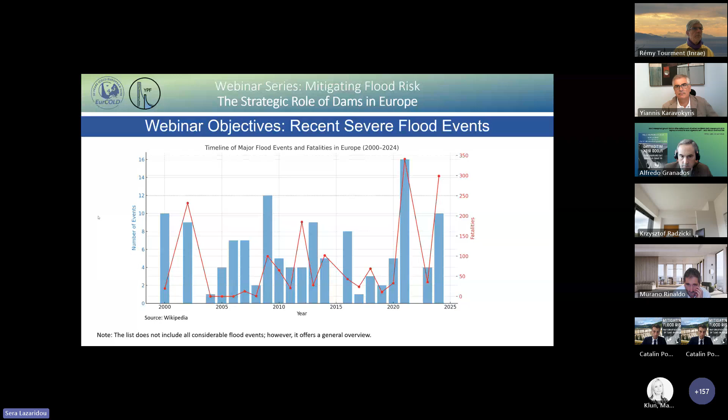Another objective of the webinar is to highlight the role of dams in mitigating flood risk within the framework of European directives and national regulations. The EU Floods Directive, as a general framework, recognizes that floods arise not only from rivers, rainfall, or the sea, but also from man-made infrastructures such as dams and reservoirs. However, dams are not recognized only as a potential source of risk. They are acknowledged for the major benefits they provide in flood control.

Many reservoirs across Europe are operated to temporarily store flood waters and reduce downstream peaks. The directive requires these operational measures to be documented in flood risk management plans, together with their expected effect on flood reduction. In recent years, member states have also been encouraged to adopt more adaptive approaches, for example, adjusting rule curves or releasing water in advance of extreme rainfall based on forecasts. These actions help to increase available storage and are often coordinated with operators, water agencies, and civil protection authorities.

Because the Floods Directive must work in harmony with the Water Framework Directive, any changes in dam operation for flood control must also respect environmental flow requirements and avoid ecological deterioration. Across the EU, this combined approach, assessing failure risk, improving preparedness, and using control operation, shows that dams are viewed both as potential hazards and as vital tools in reducing flood impacts. The overall goal is to ensure coordinated, transparent, and adaptive management of reservoirs within each river basin.

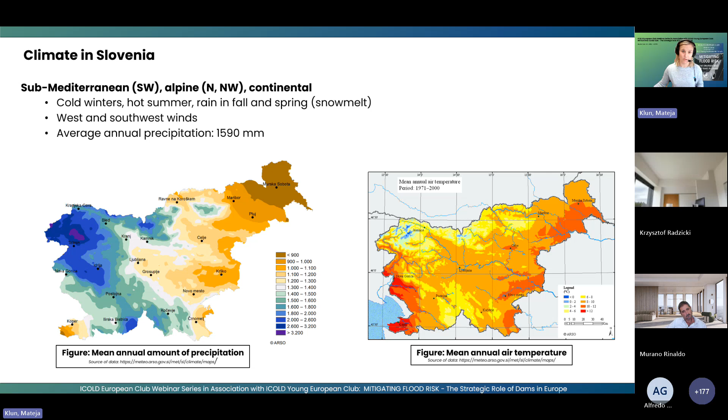The average temperatures in Slovenia are around 10 degrees. Then again, based on the local properties, these values vary quite a lot. Similarly to the weather formation is also our hydrography and terrain. We have a lot of rivers and watercourses, roughly 2 kilometers of river stream per 1 square kilometer of our territory. We have 4 large rivers. The majority of them flow to the Black Sea, and one of the large rivers, the Soča River, flows to the Adriatic Sea.

Regarding the terrain, we are located in the region where the Alps, the Pannonian Basin, the Mediterranean, and the Dinaric Alps meet. So there is quite a large diversity in the terrain, and similarly when it comes to weather. When a weather front in Slovenia moves just a few kilometers, when we are talking about warning the nation, an entirely different part of the country can be flooded, just by a little bit of a switch or uncertainty in how the weather is forming.

So besides these properties, our country is also very prone to landslides. More than half of the country is identified as an area with high landslide susceptibility. So when it comes to natural events, a lot can happen to us, and a lot has been experienced in the past. So now in 2023, what was happening in August?

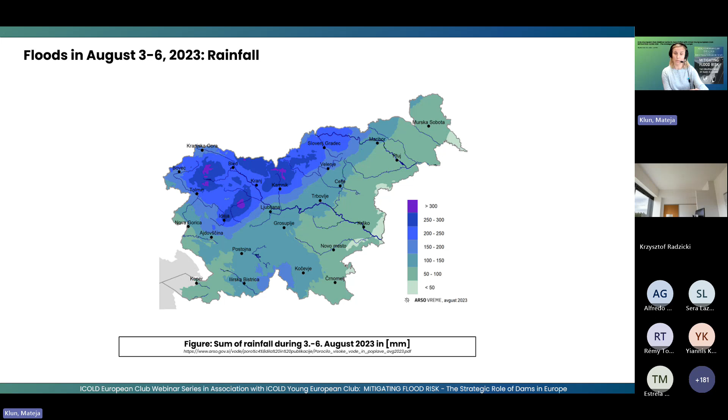Our National Environmental Agency has a distributed network of hydrological stations, and at 122 hydrological stations, extreme flows were measured. 74 rivers across Slovenia were flooding during those 3 days. At 31 stations, the measured flow was a 100-year flood or even larger. And this was also not usual. The 3 largest rivers, Sava, Drava, and Mura, were all flooding simultaneously. This was not something that we had experienced before.

Here are some figures from the flooding, the landslides, and the effects that happened during the event. Basically, 17,000 square kilometers of Slovenia were affected. We had over 1,200 larger landslides and a lot of smaller ones. Roughly 1,000 households were destroyed and 15,000 households affected.

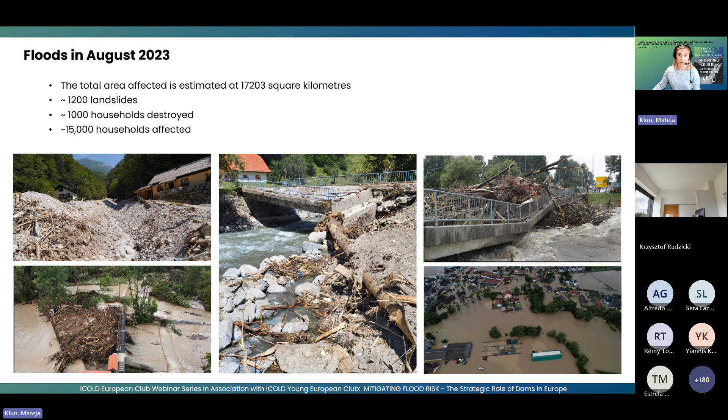At the moment, we are still in the rehabilitation phase. It has been estimated it will take us 5 years, probably in the end even longer, to recover from this disaster. Now, if I go further into the dams, we have in total 43 large dams in Slovenia and an additional 28 that have special operation regimes. Also, we have a large number of smaller dams, mostly located in the Alpine region of Slovenia.

In today's presentation, I will focus on the run-of-the-river schemes because they were the ones that were involved. We have run-of-the-river schemes which are mainly used for electricity production on three main rivers: Drava, Sava, and Soča. As I mentioned, run-of-the-river means what flows in also flows out, and they have only limited retention capacity. All of our rivers have a torrential character, so we have very high yearly fluctuations of flow, and we have operators that are used to dealing with situations with high flow variability.

If I now focus on the Sava River. The Sava River is basically the largest Slovenian river that has its origin in Slovenia. We have other large rivers, but they are not originating in Slovenia. So what was happening on the Sava River? As I mentioned, we were warned by the National Environmental Agency one day before the event that we can expect large flooding. And this means that the operators of the dams need to go into the flood regime.

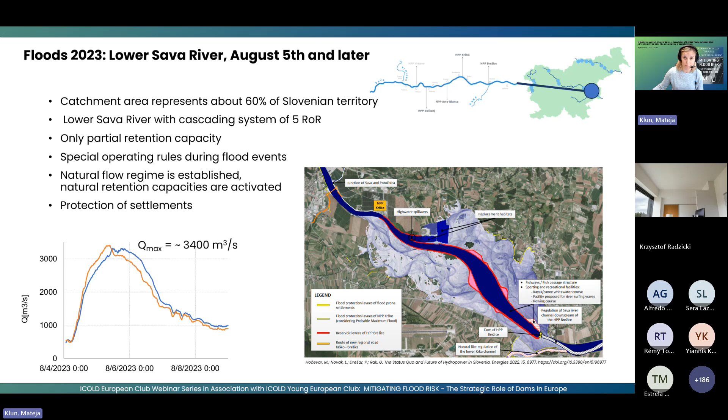During these floods, these flood retention areas were activated. We had similar flows in the year 2010, when the last two dams in the chain weren't installed, and there was flooding. Krško town was flooded and other settlements in this region were flooded, but this time, with the activation of the flood retention, the settlements were protected. And this area drains roughly 60% of the Slovenian territory, the territory where at this time we had the rainfall. We had floods upstream, but basically this region, due to the dams, was protected from flooding.

It was activated the entire month before, and it's used to protect the settlements in the karstic region from flooding, and it has worked. So basically it has 12 million cubic meters of volume, and the water that flows through the settlements is redirected to this reservoir, and then it's slowly released downstream.

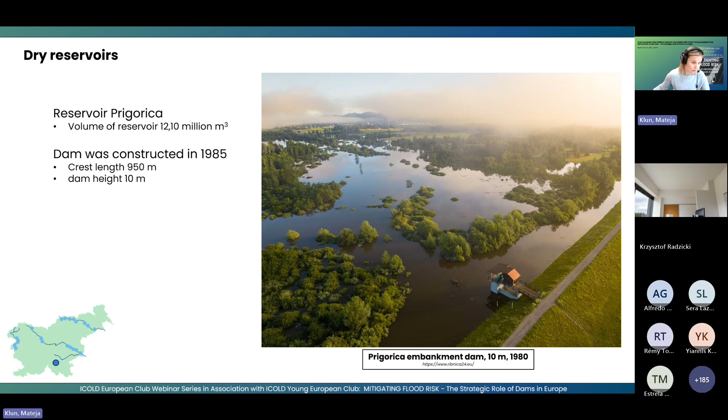And another case, and I will finish with this case, this is the case in the south of Ljubljana. As I mentioned, we had flooding happening in 2010, and in 2010 also the south part of the city of Ljubljana was flooded. In this time, there were measures to mitigate flooding in the south of the city, including the building of the dry reservoirs. And in 2023, with similar flow situation, the south part of the city of Ljubljana was not flooded because the dry reservoirs did their job.

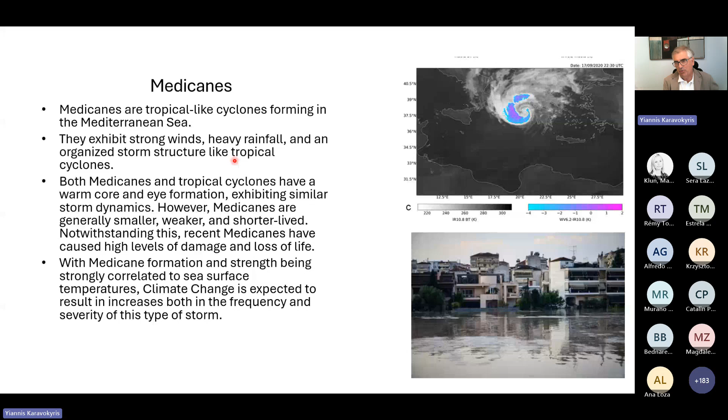One can see rainfall. Maximum daily rainfall in Thessaly, areally weighted, was 273 millimeters, over the entire event just under 300 millimeters. And there were some stations like Plastira hydropower station, which measured 535 millimeters in one day. So this was a very severe event.

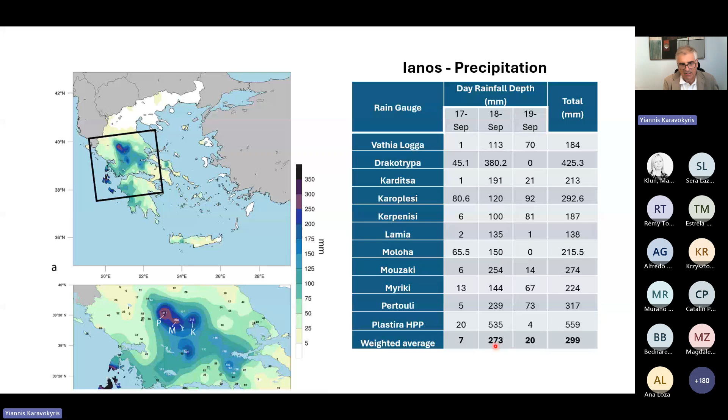And of course it had, as expected, quite severe results, particularly in the western part of the Thessaly plain, because this is where most of the rainfall was concentrated, the high intensity rainfall. On the right picture, we can see the city of Karditsa, another 15 villages. Overall, 5,000 homes were flooded and businesses, and there was extensive damage to cultivations.

Now, moving on to Medicane Daniel, which took place only 3 years later. This concentrated minds, because one can always think that a Medicane like Ianos was a one-off event, but then we have another one which is worse within 3 years, and not exactly the same, but very similar mechanisms, actually, especially concerning what happened in Thessaly. This low system actually did develop in the Ionian Sea to the west of Greece, and then it moved southwards, intensifying, in fact, to Libya, and there in Libya, of course, it caused huge damage because of the failure of 2 dams.

Compared to Ianos, when in Greece, pressure was not as low as with Ianos. And this is one of the reasons that it didn't cause so much damage where it was located. But as we shall see in the next slide, there were synoptic circumstances, meteorological circumstances that created very high rainfall, again in Thessaly, induced by this system.

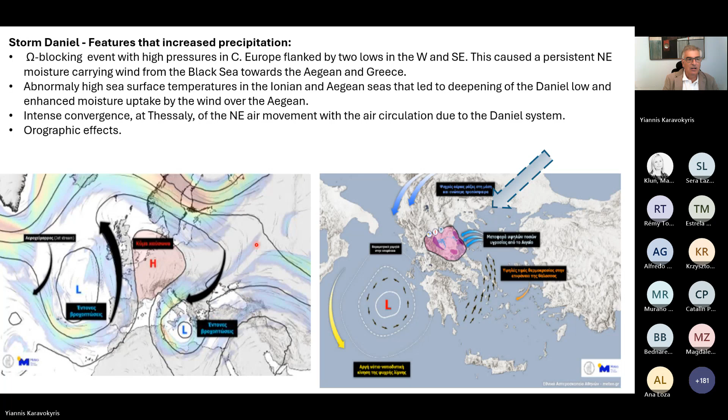But you can see some of the measured rainfall depths. The max, in 2 neighboring stations, was 765 and 760 millimeters. This was a record for Greece, and 757. And these are sorted in decreasing numbers. So you can see that we had several stations above 300 in one day. Now, when looking at storm total over the 3 days, above 1,000, of course, is more than 1 year for Greece. So these are huge depths.

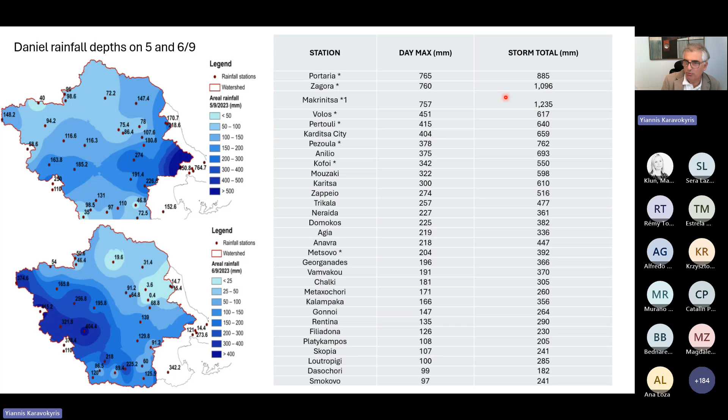Not surprisingly, again, we had very big impact. About 10,000 hectares remained underwater almost a year after the event. Overall, the agricultural land that was flooded was much more. There were 16 deaths in Thessaly. A lot of people had to be evacuated, but about 4,500 people had to be evacuated in an emergency manner by airlifting or by boats. The city of Volos, which I mentioned just now, was damaged a lot under an urban type of flood.

Major transport works were affected, and the railway line, for example, was cut for considerable time after that. Total damages were estimated at 2 billion euro, but these are direct damages. I mean, certainly there would have been indirect impact also.

Now, we should also mention Libya, because there Daniel led to the breach of 2 dams, and then the flood waves went through the city of Derna, and there were more than 10,000 deaths. This was a huge event for Libya.

What I wanted to point out is that besides rainfall, you can see this barrage dam within the plain. This is the main river, Pinios. During the flood, we had a lot of debris coming down, which also affected it. This is a 10-meter width gate. It's not only the flood event itself, the flood water, but also all the debris that affected the capacity of the structures to accommodate the floods.

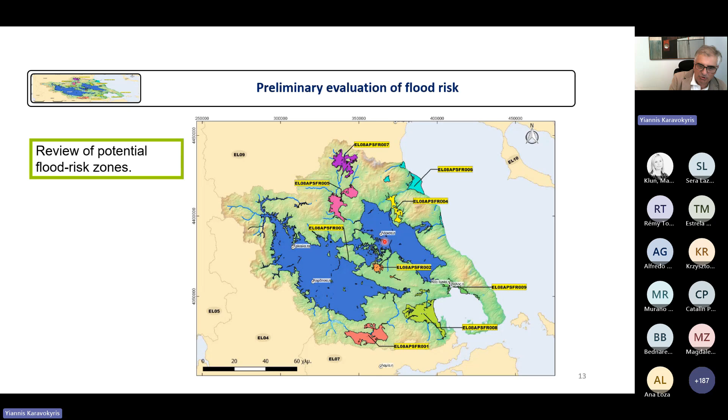So yes, first of all, the zones of focus had to be based on past records and on a first fast assessment of risk. And you can see the codification of the different zones for the entire country so that we have a unified system.

The depth, duration, frequency analysis was carried out by a team of NTUA, National Technical University of Athens. They applied uniformly the GEV, generalized extreme value distribution, for the whole of the country, and we arrived at grids of parameters for the whole of the country. This is the grid of parameters for Thessaly.

As I mentioned, we used HEC-HMS. The same was used for the entire country. We had a unified methodology to produce, in the surrounding mountainous areas, the hydrographs coming into the flood zone, and then the flood risk zone was modeled by HEC-RAS to produce inundation maps.

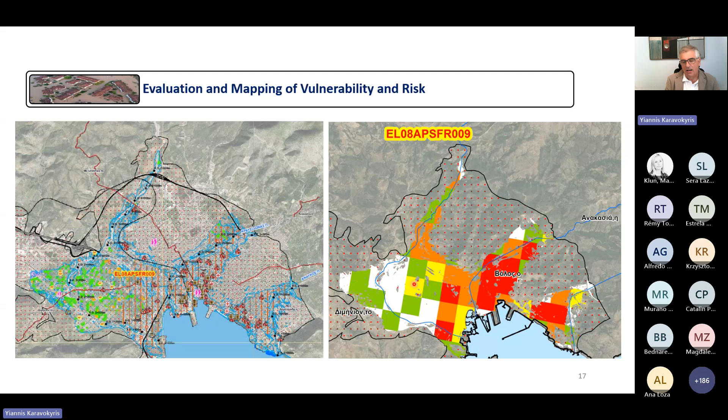We also had to map vulnerability, different sensitive infrastructure within the zones, gridded maps. From sensitive infrastructures and populations we arrive at grids of vulnerabilities, and this allows us to have risk maps in the end. Type of actions: overall, there were 31 measures eventually after consultation.

9 of them were related to prevention. Prevention mostly had to do with change of land uses, even moving infrastructure and even in some cases villages. Protection, of course, is what we will talk about immediately afterwards, has to do with flood protection in terms of structural measures mostly. Readiness has to do with early warning, development of early warning systems, and evacuation and emergency preparedness plans. And rehabilitation is, of course, obvious. It has to do with repairs of damages.

Now, Thessaly has some hydrographic characteristics that influence the type of floods we have and the design of flood protection measures. So there are two plains surrounded by low hills, and then in the periphery we have higher mountains. The western and eastern plain are connected by gorges that form a control in the flow. And the same happens with the eastern plain. Its outflow to the Aegean Sea again is controlled by gorges.

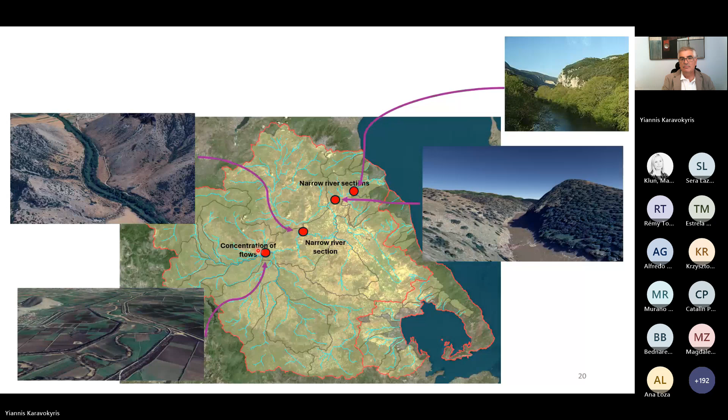So this is again some pictures of the gorges and also the area in the western plain where all flow from all the mountains concentrates and where usually flooding inundation starts. But quickly about the catchment management measures, this program is now under detailed design. It's quite an extensive program.

It is of course controlled mainly by the forestry authorities, and it involves a number of measures related to reforestation, strategic plantings, standard aerial sediment transport checks like terracing, bands, etc., and small check dams in the ravines and small streams. So this is an extensive approach.

And of course, coming to the core of our concern in this presentation, the dams for flood protection. There is already one dam, Smokovo, which is a multi-purpose dam in Thessaly. And when it was designed, flood protection was one component of the multi-purpose nature of the dam. So it was designed with a high freeboard and narrow spillway. It is upstream of the western plains.

There was a lot of flooding in the past in the areas downstream of the dam. This dam didn't allow any flooding during Ioannis or Daniel. What happens is in September, when both events happened, these multi-purpose dams, because it's the end of the irrigation season, tend to be at least half empty. This was half empty, and in fact it didn't spill at all. But as we shall see later on, spills will be much reduced even with the dam at full supply level.

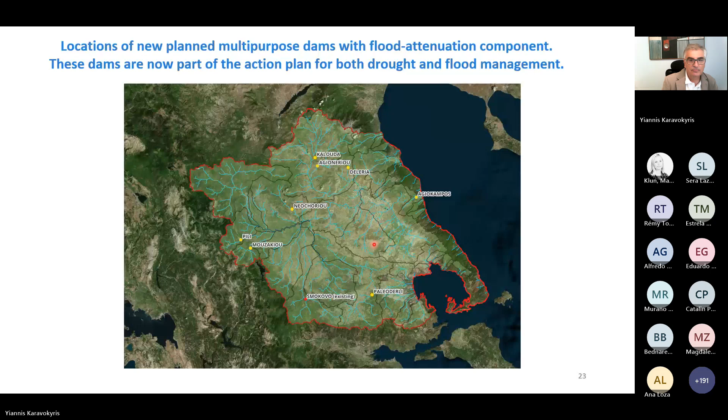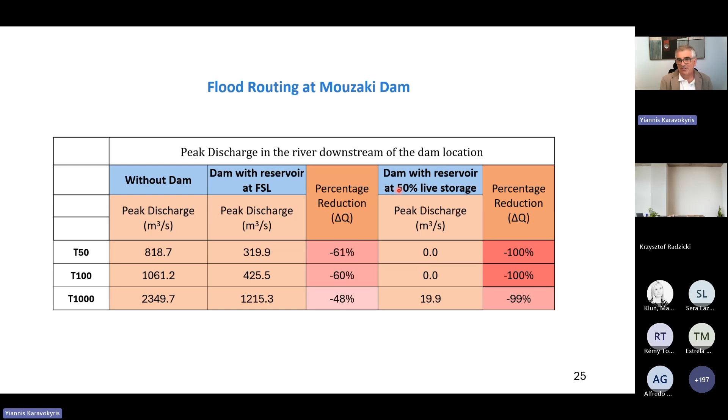So some examples from the new dams. I don't need to stay too long on this. This is the return period of floods that we tried. This is with the dam at full supply level, and this is the dam more realistically for autumn, at about 50% storage. And you can see, we don't need to look at the actual numbers, but the reductions in peak are very substantial, from 61% for the 50-year flood, 48% for a 1,000-year flood, and the percentage reduction is 100% if the dam is half empty, so basically no spilling.

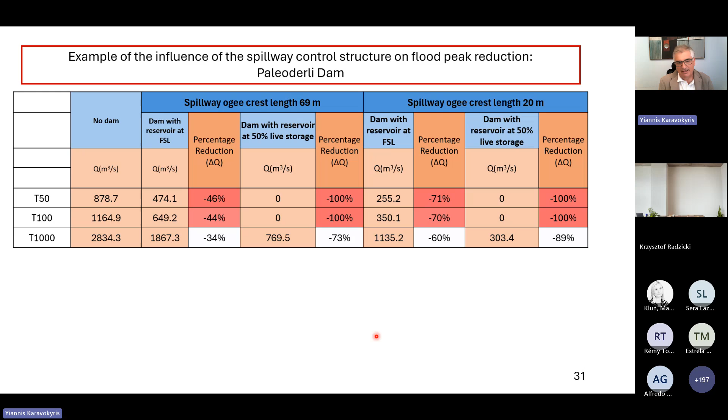And also an example out of interest, what would happen if we raise the dam and reduce further the spillway, because at the moment 69 meters is the preliminary design of the dam. So we can see that, looking at FSL, if we reduce further the spillway, the 1,000-year flood will go from 34% reduction to 60% reduction, and for a half empty reservoir, from 73% reduction to 89% reduction. So one can use this to do an optimization regarding heightening the dam and shortening further the spillway or not.

The benefit of a shorter spillway crest length is of course a greater reduction of flood peak, and the drawback, of course, is higher maximum reservoir water elevation, which leads to a higher dam. So we need cost-benefit optimization there. But for seismically active areas, it should also be taken into account that higher dam freeboard also provides an additional service which allows a greater margin of safety against seismic loading.

Just a very few words on free overflow, which I mentioned for Thessaly, versus gated spillways. Undoubtedly, gated spillways give us a wider choice for flood management policies because they allow us to do a real-time preemptive operation of the spillway. So if we have a stream of meteorological and hydrometric observations, we can preemptively increase available routing volume in the reservoir by opening the gates early.

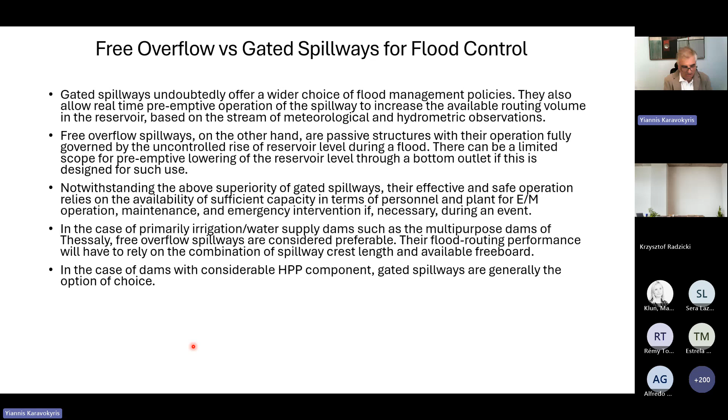So, for example, in the case of Thessaly, where the dams are primarily irrigation and water supply plus flood defense, it is more sustainable to have free overflow spillways. So it is the design of the spillways and freeboard that will give us the flood attenuation and protection component that we require. But if we look at primarily hydropower dams, then gated spillways are probably the option of choice, because the personnel has to be available either at the dam or from where they will be able to quickly tend to the electromechanical infrastructure of the project.

Some final design considerations. Flood routing in a free overflow dam in particular, but in all dams, is a period where you have large fluctuations of reservoir water elevation. In general, this we avoid in normal operation, so a number of precautions are important. For embankment dams, the upstream shoulder should be designed for these fluctuations in terms of drainage and filtering. So for a dam designed for flood routing, these can be higher, more stringent requirements perhaps, than a dam that will only experience large fluctuations in reservoir level in an emergency event.

Also, for all dam types, the reservoir rim and the reservoir slopes may experience instabilities during rapid fluctuations of levels. So really, part of the design should include a good study and survey of slopes around the reservoir, and design of stabilization measures, including provision of better drainage of slopes, if necessary.

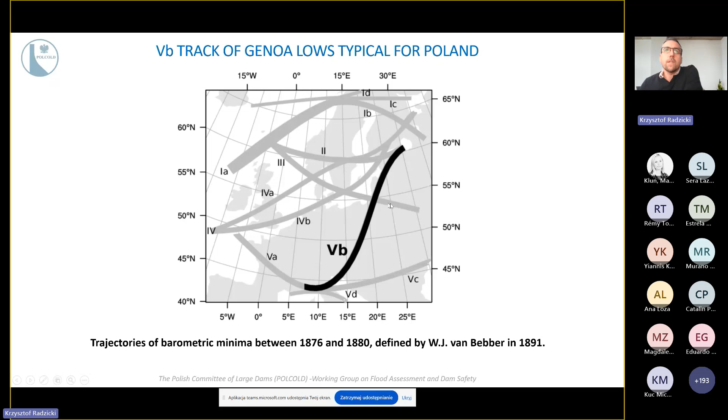So, the September 2024 flood was created in Poland by Genoa lows, which typically touch us every 15-20 years, probably for thousands of years. So it's a typical part of this Genoa low.

And this time, well, usually they make precipitation in the south part of Poland, but it depends. Sometimes stronger on the Odra River mountain catchment or the Vistula River mountain catchment. We have two main rivers in Poland: the Vistula, which crosses the central part of Poland, and the Odra River, which firstly goes along the mountains, and after this along the border between Poland and Germany.

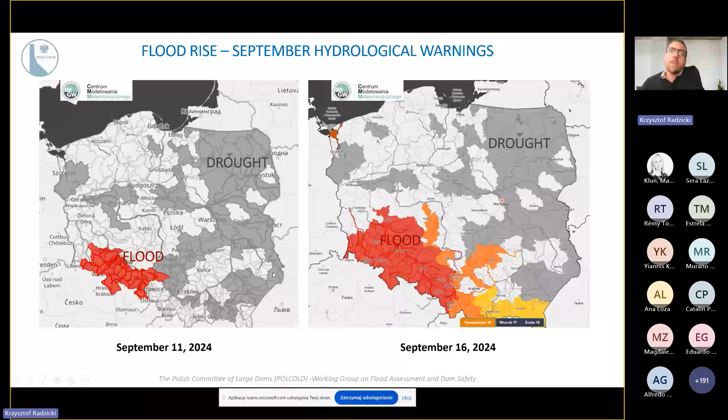So this time, this was mainly the mountain catchment part of the Odra River and a small part of the Vistula River, but it also will be important for this story. And what is important locally, it was exceptional, the first time such strong precipitation was seen in this part of Poland. And so the main precipitation was in this mountain part of Poland, after which the danger of flood was propagated along the Odra River.

Now it is in renovation. And some conclusion for that is that the old masonry dam survived even when flooded. Verification of the discharge capacity of existing hydrotechnical structures for present catastrophic flows is required, with consideration of climate change prediction. If necessary, reconstructing or expanding the discharge facilities and adjusting the reservoir operation policy is also necessary.

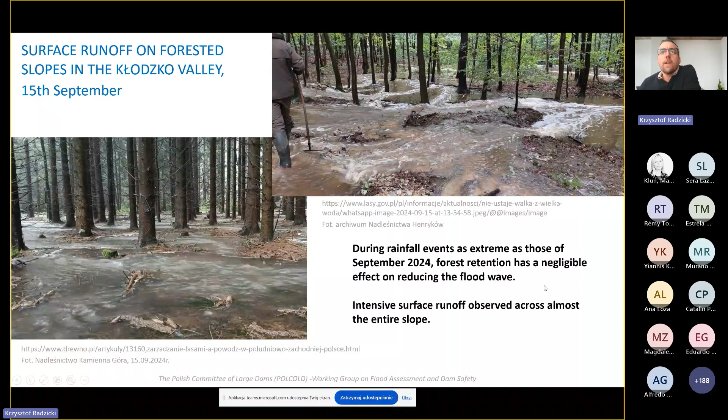What was also very interesting, you can see here photos from the forest in the mountains. So during rainfall events during this time, forest retention was negligible in its effect on reducing the flood wave. Intensive surface runoff was observed across almost the entire slope. There are 4 new dry reservoirs. You can see them. They were built during the last about 10 years, maybe 15 years, and they worked well. Here you can see Roztoki dry reservoir, one of them. So fully filled, it worked well.

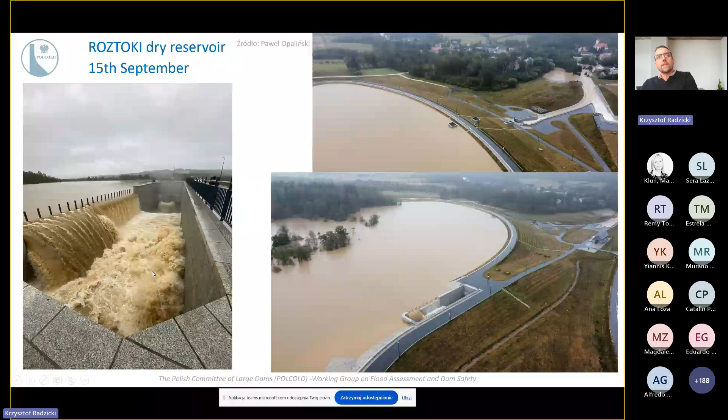And some conclusion. So these newly constructed dry reservoirs operated correctly. However, the small mountain catchments didn't experience the most catastrophic local rainfall that occurred in the Stronie Dam catchment. Some of these new dams significantly reduced local flooding in small towns situated not far downstream from these reservoirs. However, to effectively reduce flood risk in larger cities of the lower Kłodzko Valley, it's necessary to build a coherent system of a much larger number of reservoirs, verified both hydraulically and economically.

So this was the region where these 4 new reservoirs were located. Here we have the small old Międzygórze dry reservoir. It's also an old German masonry dam. It worked correctly. It wasn't overflowed, just the spillway worked.

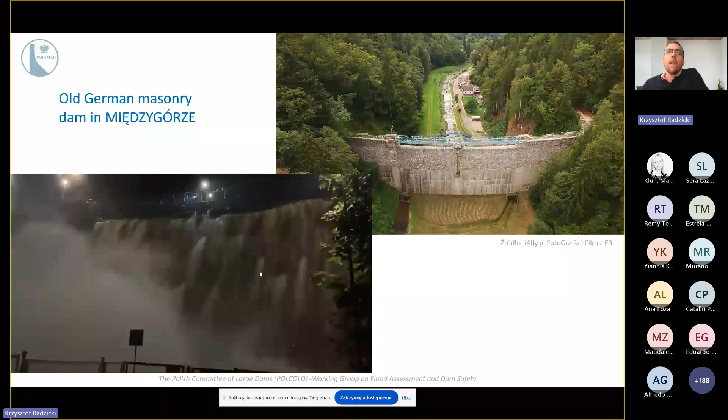And now we go to the east, here to this small mountain catchment. You can see here is the Stronie dry reservoir. Some hundreds of meters below it is Stronie Śląskie town. After 5 kilometers further we have Lądek-Zdrój, an old spa town, and after 30 kilometers down we have the larger city Kłodzko, and the river, the Biała Lądecka river. So this earth dam, the Stronie Śląskie dry reservoir, was a 16-meter-high dam with a very small 60-centimeter wall on the top of the embankment.

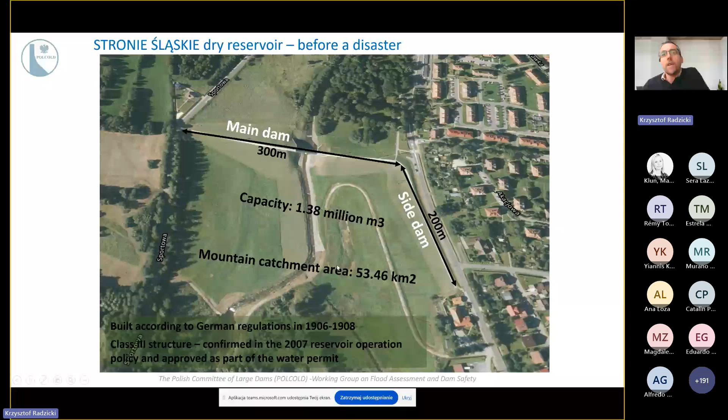Capacity about 1.4 million cubic meters, mountain catchment area about 54 square kilometers, constructed according to the German regulation more than 100 years ago, about 120 years ago.

And this dam was destroyed. There are some very interesting movies about this story, what has happened, a very well documented story, so you can watch it on YouTube if you would like. So the main rain happened on 14th September.

During one night, most of the reservoirs I spoke about were filled. Also this dam. You can see local people tried to build an additional small wall with sandbags, and during the night the reservoir was filled. In the morning it was still filled, but there was hope. People observed that there was a small reduction of the height of the reservoir.

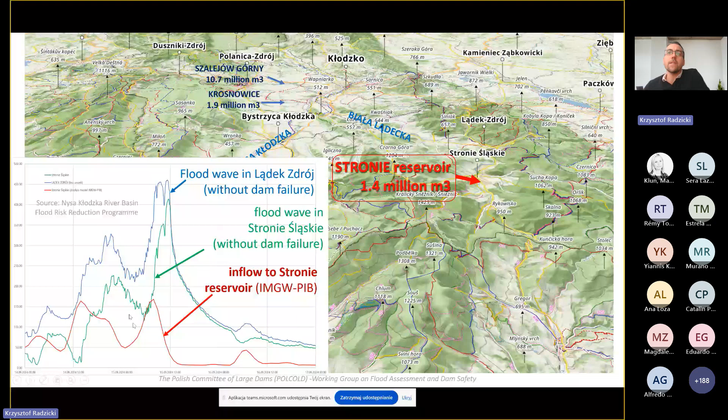However, unfortunately, there was a second event of heavy rain which came to the catchment, and it raised the level of the reservoir higher than the crest. So here you can see this wall of sandbags and some leakages between the sandbags, and some side dams, you can see side dams here, were overflowed. I think the height of the flow was about 10 centimeters, so quite a huge flow, and it resisted even 2-3 hours of this situation.

Here you can see some overflowing by the crest between the sandbags, and unfortunately, after about 2-3 hours, back erosion happened, which was prolonged in the direction of the crest. Probably this hole created leakages, a saturated zone, and water flow in the saturated zone, seepage, created prolongation of erosion and destruction of the crest. And during about 30-40 minutes, the dam was totally destroyed.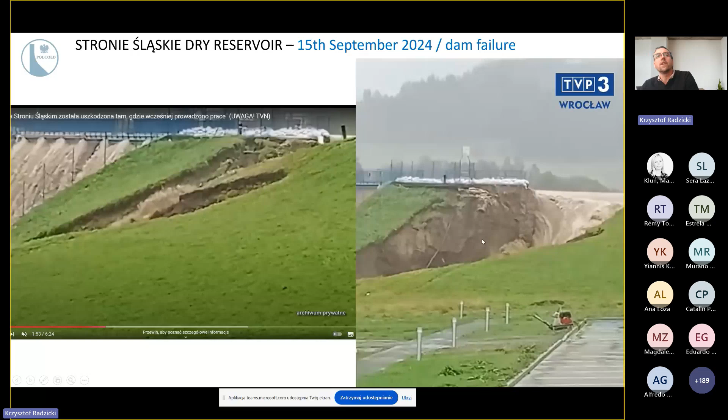Here you can see the effect of the destruction. If you are interested, there is very nice photogrammetry of the catchment after the disaster made by GeoGlass, which is on the internet. You can freely use it to look at it.

Some small conclusions. So the first one, there were unfortunately the pier supports located on the top of the spillway. Not a very smart idea. However, it wasn't the main problem of overflow. Just the wave was much larger than the capacity of this reservoir. Also, we should take care about larger and more robust grates for the bottom outlets to prevent clogging of the bottom outlets.

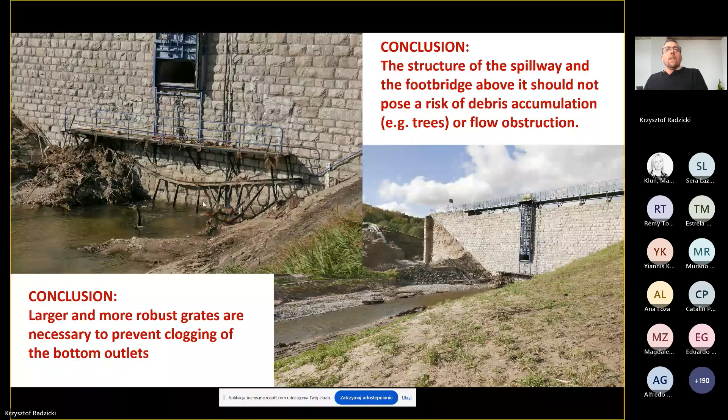And again, key conclusion. So we need in Poland generally verification of the discharge capacity of existing hydrotechnical structures, dams particularly, for present catastrophic flow. Catastrophic flow is required with consideration of climate change prediction. If necessary, reconstruct or expand the discharge facilities and adjust the reservoir operation policy.

So, the Stronie dry reservoir, as I told you, you can look at it on the internet. Some hundreds of meters below there is Stronie Śląskie town, destroyed very seriously. Some houses totally destroyed, many houses partially. After 5 kilometers below, we have Lądek-Zdrój town. Here you can see the hydrograph. So without this catastrophe, it could anyway be flooded by more than 1 meter.

But this wave of the dam catastrophe gave additionally about 120 centimeters of depth. Here you can see the hydrograph, and here this peak modeled. This is the peak of the dam collapse, and it has about 1.4 million cubic meters, so the capacity of the dam. Maximum discharge was 1,000 cubic meters per second.

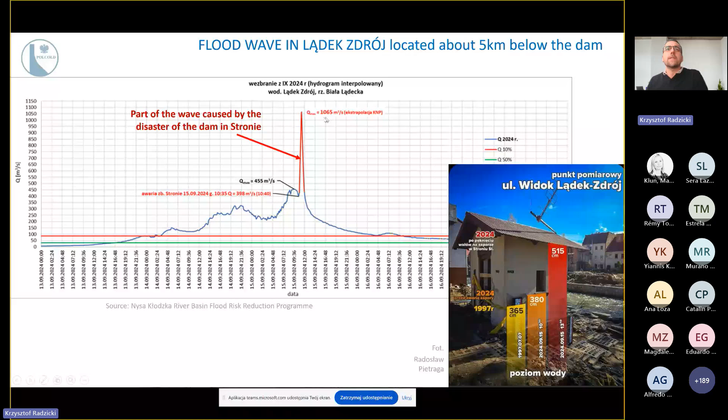So here you can see destruction of the town, Lądek-Zdrój. Also there was large devastation, destruction of the villages and the riverbed between and below these towns. So key conclusion, there was a very serious communications failure. During the dam failure, GSM telephone service in the region collapsed and other means of communication proved inadequate. As a result, the warning about the dam failure didn't reach most of the affected communities, and a nationwide review of the disaster response communication system is therefore necessary.

Also, we can say that the people were used to this dam, that it works. So this failure demonstrates that even smaller dams can pose a catastrophic threat to nearby towns, and we have to take care about these structures. In the town Kłodzko, approximately 30 kilometers downstream from the dam, the wave generated by its failure didn't substantially raise the flood risk.

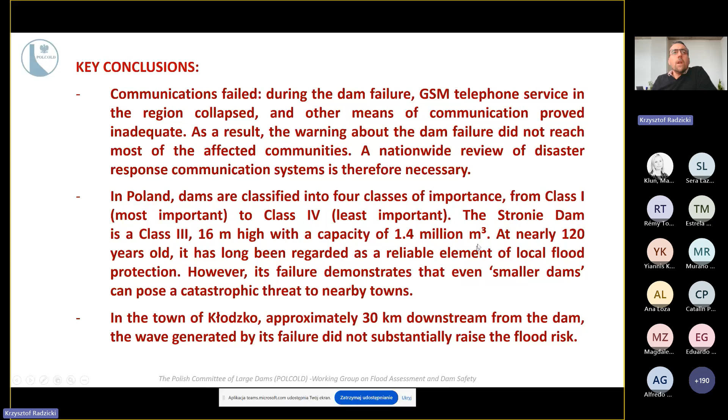New dry reservoirs are planned to create flood protection of the region. Only a comprehensive system will be efficient. I am proud that with my colleague Bolesław Zatoka, we proposed one of the clever solutions of the two new reservoirs that can protect locally Lądek-Zdrój, with a smart bypass between these two reservoirs to protect this town.

Next, the water from this river goes to a cascade of reservoirs, Topola, Kozielno, Otmuchów, and Nysa. And one of them is interesting because we have destruction of the emergency spillway due to heavy flow. So you can see happily it collapsed in a very smart way. Maybe it wasn't a smart construction, sheet piles and gabions between, so gabions were taken out by flow, afterwards erosion. However, the sheet piles collapsed each one on another, so in consequence there wasn't total destruction of the spillway.

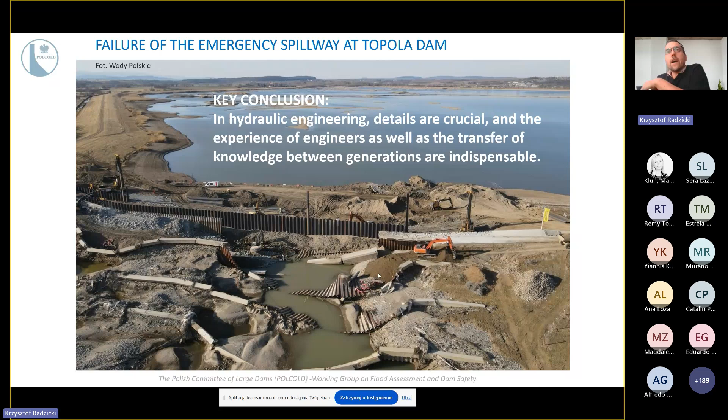However, in hydraulic engineering, these details are crucial, and the experience of the engineer as well as the transfer of knowledge between generations are indispensable. And we have a problem with that in Poland. We don't have enough hydraulic engineers. We don't have enough transfer of knowledge between generations.

After that we have the Nysa reservoir at the end of this cascade. Unfortunately, there was a flood in the city due to two reasons. The first one, I told you about the Głuchołazy town flood here. So the flood overflowed and goes to Nysa town. However, there was also a problem with the dam.

According to the official story, they thought they passed 100 cubic meters per second, but in reality it was probably something like 1,600 cubic meters per second. It means there was a mistake. And of course, the explanation of these mistakes is a serious problem and an investigation, and we cannot speak a lot about the reasons.

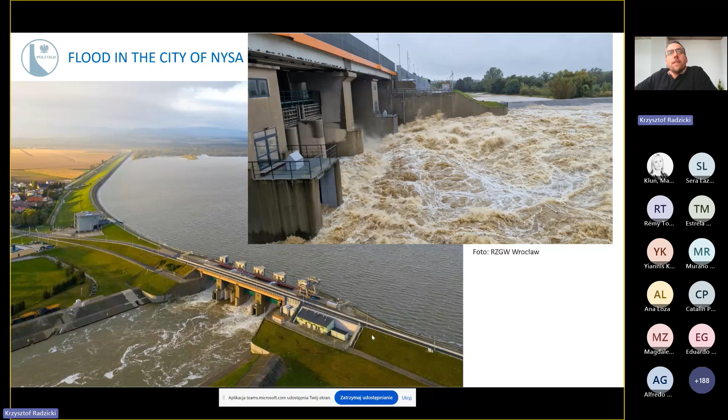However, it's important in hydraulic engineering to take care of the details of the exploitation of reservoirs. Some information is sometimes missed between persons; the transfer of information could be crucial in consequences, for example, like a flood in the town.

After that we have the large Racibórz Dolny earth dam, a large dry reservoir here at the entrance from Czechia. Here there was also quite strong precipitation, which comes to Poland. It is a large reservoir, 185 million cubic meters, filled almost in one day. It works very well, reducing the wave twice, and also delaying this wave on the Odra River.

So the wave from Nysa Kłodzka can pass before the second wave from the Odra. So this Racibórz reservoir had a very important role in flood protection on the Odra River. However, there were some serious problems with backward erosion processes. They were happily protected. However, this dam was constructed after 2010.

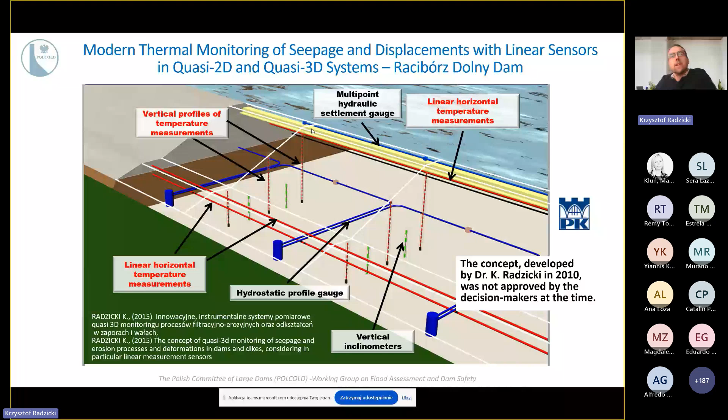In 2010, I proposed a very modern system of linear sensors to detect all leakages automatically. Unfortunately, at that time, decision makers did not approve it. The first system like that was created in Poland in 2014. Regarding the condition of dams in Poland, many of them are in an inadequate state. So as a conclusion, given the large number of damming structures in Poland, many of which are in inadequate technical condition, a key solution is the use of modern testing and monitoring methods to optimize repairs and minimize the risk of failure. And three last slides.

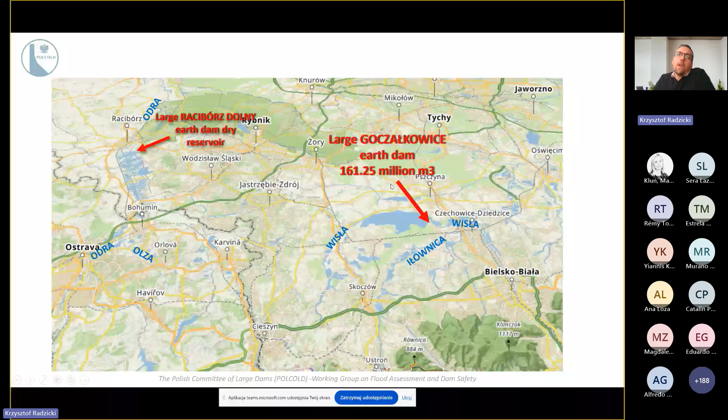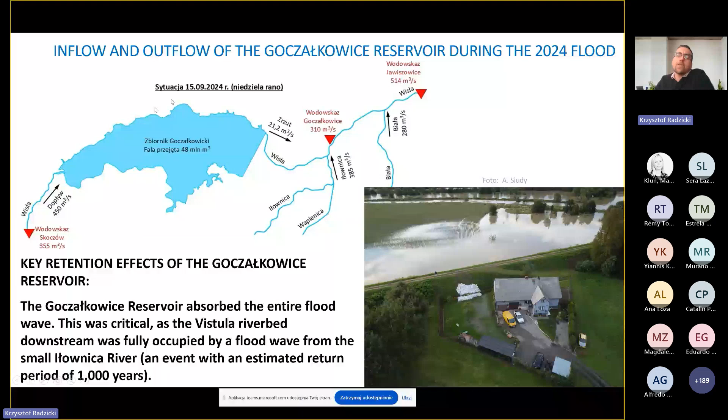I told you also about the Vistula River catchment here. Part of this precipitation in September also touched this catchment. And there is the large Goczałkowice earth dam, 160 million cubic meters of capacity. Happily, during the drought it had a low water level, and it was capable of catching the whole flood wave. Happily, because just below this dam there is a small mountain river, the Iłownica River, where the flood had an estimated return period of about once every 1,000 years, so very huge. So this small river filled the main Wisła River, and happily the Goczałkowice reservoir caught the whole wave.

So the total losses caused by the September 2024 flood in Poland exceed 13 billion, about 3 billion euros. And final conclusion: large flood control reservoirs such as Racibórz Dolny or Goczałkowice Dam are crucial for flood protection of vast areas of Poland, and they fulfilled this role during the September 2024 flood. In mountain catchments, only a system of smaller reservoirs can provide an effective reduction of flood risk.

Dams in Poland must have the discharge capacity of their hydraulic structures verified for catastrophic flows resulting from increasing climate change. If this capacity is insufficient, spillway structures should be expanded or reconstructed and/or reservoir operational instructions revised. For this reason, and considering the unsatisfactory technical condition of many damming structures in Poland, it was largely a matter of luck that no other dam disaster occurred besides the failure of the Stronie Dam.

Communication and warning systems for natural and technical disasters, including dam failures, must be verified and, if necessary, improved. The development and implementation of modern systems, methods and methodologies for testing, monitoring, forecasting precipitation, rainfall-runoff transformation, flows, and dam performance are key to minimizing flood risk and optimizing the repair and modernization of damming structures.

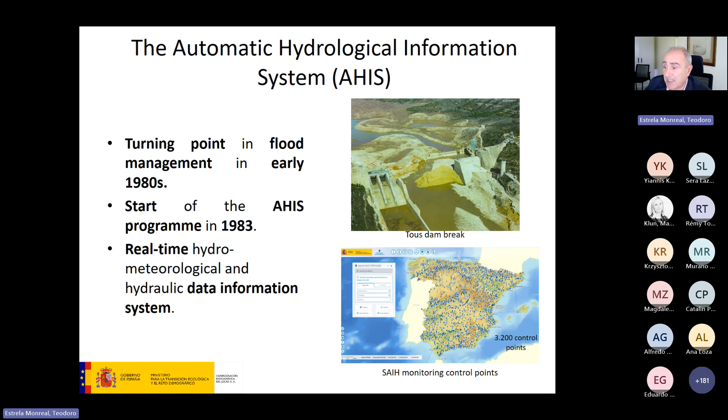Also, more than 40 years ago, the water law and the hydraulic public domain regulation established riverbed and flooding zoning in Spain. That really has been very important to avoid damage in the flood plain. In the year 2008, a new zone was added, what we call the preferential flow zones, and then important land use restrictions were established in the year 2016. And now new changes are being prepared in our regulation after the October 2024 flood in Valencia.

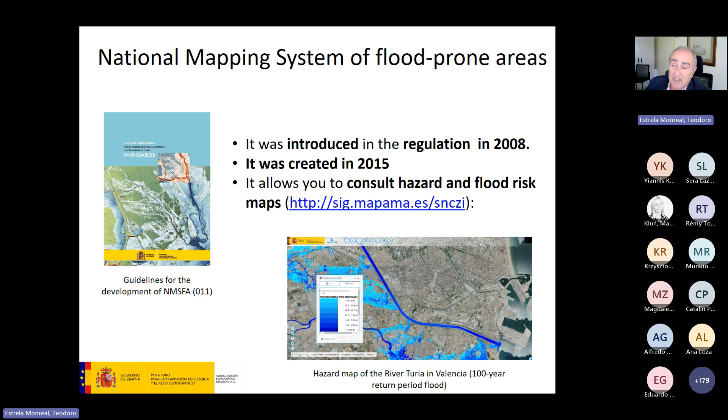As consequences of all these advances, in the year 2008 a national mapping system of flood-prone areas was introduced in the regulation. This system was created in the year 2015, and it allows citizens to consult hazard and flood risk maps in all the Spanish territory. You can see in the figure an example of the hazard map corresponding to the Turia River in Valencia, in this case for the 100-year return period flood. This is an area that has been affected by the 2024 flood.

And also all the EU countries follow the EU flood directive, and we are developing now the new flood risk management plan. As you know, this plan focuses on prevention, protection, and preparedness, and establishes a program of measures to reduce the risk based on risk maps. The last flood risk management plan in Spain was approved in 2023, and we are working on the new plans.

But the consequences of the flood of October 2024 have obliged us to prepare a previous flood risk management plan in order to be approved and to be able to develop some actions in the next years, without waiting for the year 2027, when this management plan is scheduled to be approved according to the directive.

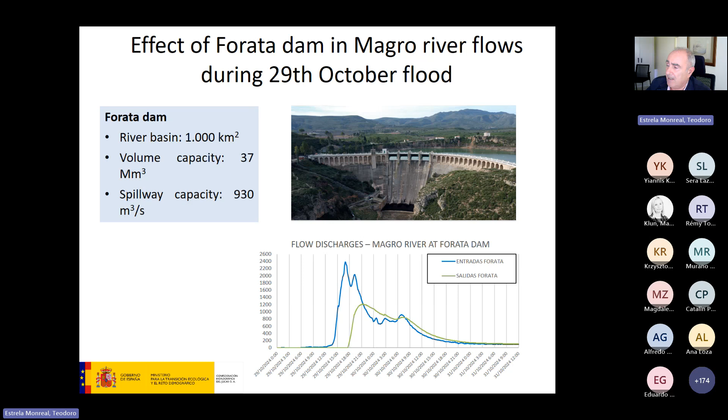The line in blue is the inflow to the reservoir, and the line in green, the outflow of the reservoir. An important volume was stored in the reservoir. It was not empty, but almost empty. And then there was an important effect of attenuation of flows downstream of the reservoir.

We have developed during these last months different models, first hydrological models, then hydraulic models. We had some models as a consequence of the development of the flood risk management plans, but we have had to adapt the models. In some rivers, as for instance the Magro River, the section has increased 30% as a consequence of the floods. The digital terrain model has changed as a consequence of the sediment produced. And we have to adapt the models and simulate, first in order to have a good knowledge of the flood, and then in order to take different measures for the future.

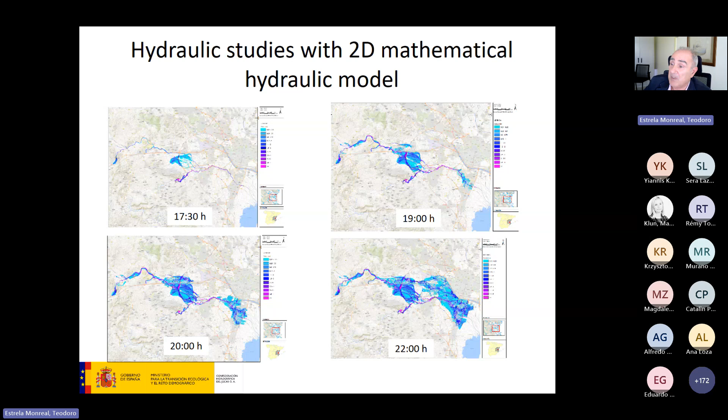This is the evolution of the flood in different hours. As you can see, the response is very fast. In the Poyo ravine, the response time is 2-3 hours, and it's difficult to take measures in 2-3 hours. As I have mentioned, the flows estimated in the Poyo ravine are greater than 4,000 cubic meters per second, much higher than the 500-year return period that was studied and defined as 1,500 cubic meters per second. We are talking about a very extraordinary flood.

And we have to rethink the flood risk management plans carried out to date in this basin and other Mediterranean basins with very short hydrological response time and, consequently, very short time to react for protecting people and flooded areas. The experience of the DANA makes it desirable, first, to consider regulatory change in flood-prone zone management. We are working on that, and in a few weeks surely we will have an important modification of the regulation.

We have to improve the early warning system. We have a good automatic hydrologic information system and models, but we have to improve on it, especially in basins with very short response time. It's important. What are we able to do with this kind of system in this kind of basin?

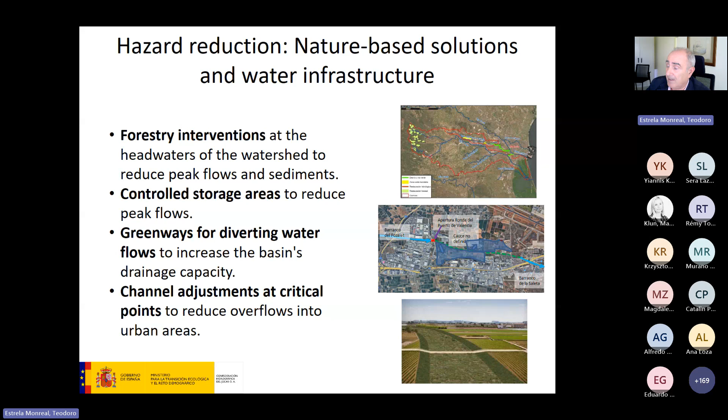For instance, all the controlled storage areas that we are working on are mainly rural areas, and we are studying different solutions in this area. But it's important because in some cases we need to make excavations in the terrain. In other cases, we have to raise some roads, and we are studying the best working of these areas in order to reduce flow discharge. And it's very, very fast what I wanted to tell you.

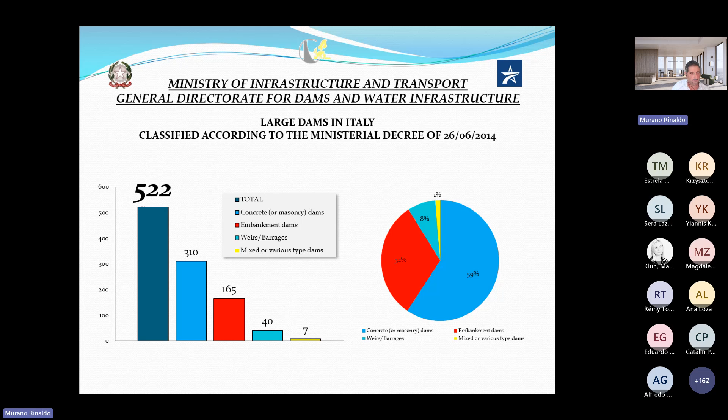I would like to share with you this first slide that, although not entirely exhaustive, provides an overview of the laws and the directives which have followed one another, starting from the second half of the 90s. The main document is highlighted in the blue panel that indicates the directive of the President of the Council of Ministers of 2004. It introduces, for the first time in Italy, the discipline of the lamination plan, a flood control plan that has to be drawn up to use the reservoirs in order to protect territories downstream of the dams

from flood events. But the matter of emergency management and the more general aspects connected to hydraulic risk downstream of dams have been revised and included in the 2014 directives, which we can see in the green and in the orange panels. Actually, they update and integrate the previous procedures. As we can see from the arrows in the slide, there is a strong interaction between these documents.

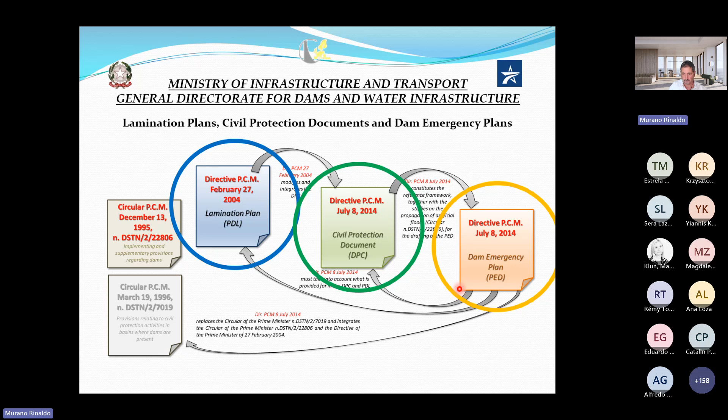And now let's focus our attention on the 2004 directive. It was the first, as I said before, to systematically identify the presence of reservoirs on the territory, intended for the regulation of flow as a possible resource for mitigation of hydraulic risk in downstream areas. Furthermore, the directive of 2004 established for the first time that through specific studies, those reservoirs that could effectively be useful for flood control and therefore for reducing hydraulic risk downstream of the reservoirs themselves must be identified.

In order to make the volumes useful for flood lamination well in advance, two different procedures can be used, defined as static program and dynamic program, from which the distinction between static lamination plans and dynamic lamination plans. The static lamination plan provides for the continuous keeping of a reservoir level lower than the authorized operating level during periods of the year considered critical for the occurrence of flood events.

On the other hand, the dynamic lamination plan operates in real time, requiring the execution of preventive and ongoing discharge maneuvers to be activated based on quantitative forecast of rainfall in the upstream basin and on the resulting expected flow into the reservoir, as well as on the state of the reservoir and the territorially sustainable flow rate downstream of it.

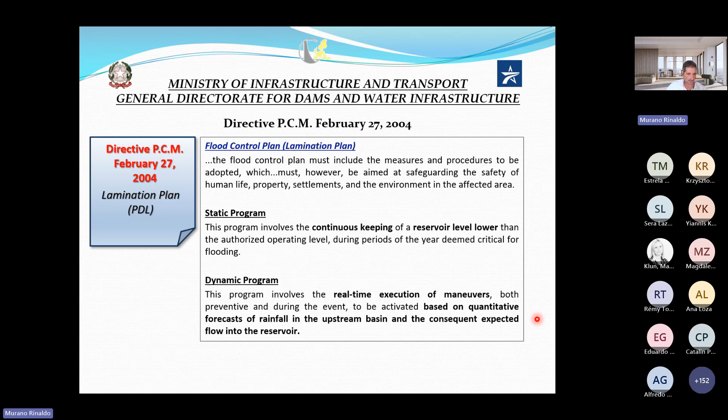The 2004 directive introduced flood control plans. However, especially before the issuing of this directive, in many cases, some large dams in Italy have been subject to operating limitations aimed at the same flood control with other regulatory provisions different from the lamination plan, with the same purpose of mitigating the hydraulic risk of downstream territories.

The Vaia storm was an extreme weather event that affected the northeastern part of Italy, particularly the mountainous area of the Dolomites and the Venetian Prealps. The event started from a disturbance of Atlantic origin, which, within the context of a severe wave of bad weather over Italy, also impacting nearby regions of Switzerland, Austria, and Slovenia, brought to the area extremely strong winds and persistent rainfall. The very strong wind, blowing between 100 and 200 kilometers per hour for several hours, caused the fall of millions of trees, thus constituting a huge natural disaster.

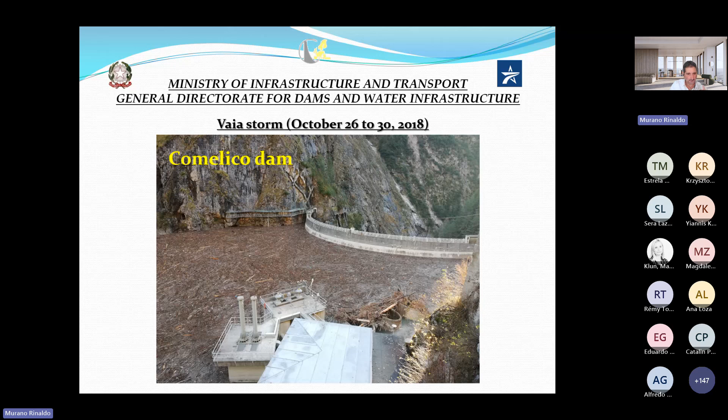Here we can see, for example, what happened to Comelico Dam, with thousands of trees close to the dam swept into the reservoir. The flood, as I said, affected several municipalities in Veneto, Trentino Alto Adige, and Friuli Venezia Giulia regions. The heavy and abundant rainfall caused the Piave and Brenta rivers to overflow, while the Adige Garda Lake tunnel was opened to prevent the overflow of the Adige River too. In the mountain areas, several streams burst their banks and many landslides occurred.

Now I would like to show you how a dam was able to mitigate the impact of the flood. I'm talking about the Ravedis Dam on the Cellina River, realized with the primary function of flood control and the additional function of regulating flow for irrigation and for hydroelectric power production. It has 22 million cubic meters allowable to manage to face floods, 22 million cubic meters.

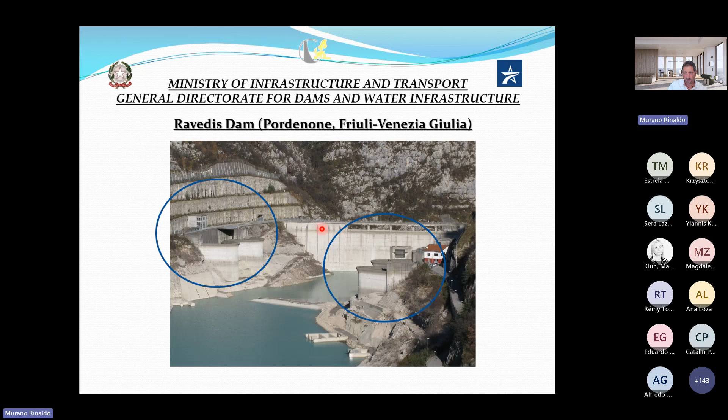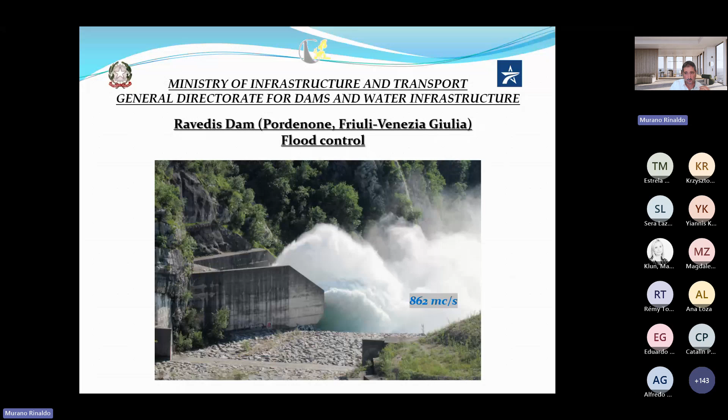Now let's focus on the second topic, hydraulic safety for large dams. We have seen that the use of reservoirs created by large dams can be useful to protect downstream territories, but it can really be useful only if the dams have a structural and functional safety, and if their discharge system is correctly designed and realized to handle floods. So, to better understand the problem, I would like to briefly tell something about the historical evolution of the construction of large dams and of the development of technical regulation in Italy.

But what is important is that the average age of large Italian dams is about 70 years. And it means that about 90% of existing large dams were hydraulically designed and built with empirical criteria, often derived from qualitative correlations, from the professional experience of the designer, without the systematic support of modern probabilistic analysis, of modern probabilistic models.

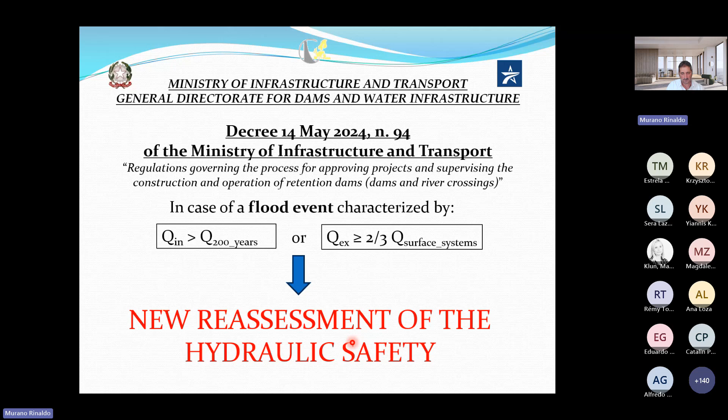So, to take also these climate factors into account, the last Italian dam regulation of 2024, for the first time, prescribes that in case of a flood event characterized by an inflow rate greater than the maximum return period of 200 years, or the use of at least 2/3 of the capacity of the surface spillway, in at least one of these two cases, the dam manager shall submit to the General Directorate for Dams an updated re-evaluation of the hydraulic safety of the dam, and of course of the adequacy of the discharge systems too.

Let's begin with Campo Tartano Dam. The design flow rate was 194 cubic meters per second. The re-evaluation led to 246 cubic meters per second, with an increase of 27% of the original. The consequent works were performed in 2007-2009, and they consisted in a surface enhancement and in the construction of a new bottom outlet.

The Rimasco Dam: the design flow rate was not determined, it is an old dam, but the original discharge capacity was about 500 cubic meters per second. The re-evaluation led to 770 cubic meters per second, with an increase of 53% of the original. The consequent works were performed in 2014-2016 and consisted in the construction of a new bottom outlet.

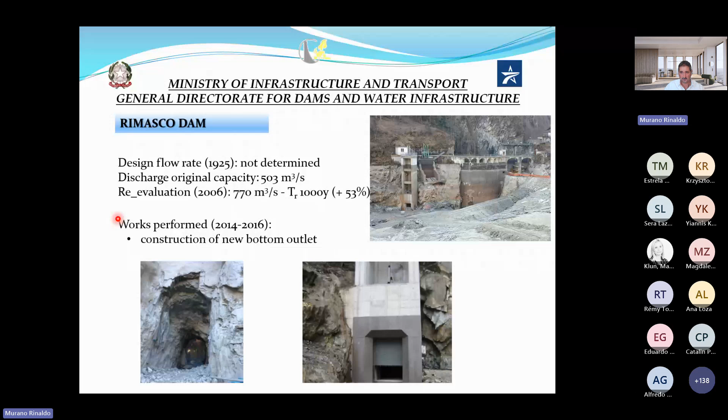Cazul Dam in the northeastern part of Italy. The design flow rate was 440 cubic meters per second. The re-evaluation led to 700 cubic meters per second, with an increase of 59%. The consequent works performed in 2019-2021 consisted in a crowning elevation and in a surface spillway widening.

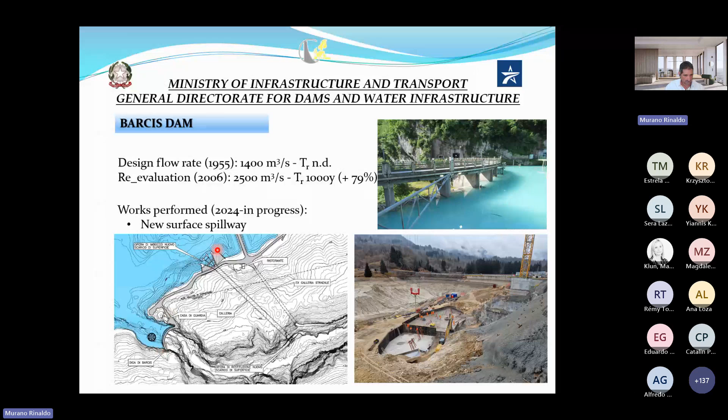The last one, Barcis Dam. For this dam, the design flow rate was 1,400 cubic meters per second. The re-evaluation led to 2,500 cubic meters per second, with an increase of 79%, a great increase. The consequent works have begun in 2024 and they are still in progress. They consist in the construction of a new surface spillway that you can see in this picture on the left. And it is situated quite far from the dam. Here is the dam, here is the new discharge, the new surface spillway.

So, at the end of this work, the following conclusions can be drawn. First of all, the presence of a dam can have an important function for the hydraulic protection of downstream territories, and this kind of solution should be used more. Where possible, it is considered advisable to prepare a lamination flood control plan that is more oriented towards dynamic rather than static flood control, capable of guaranteeing equal safety standards in the downstream territories, but determining less impact on the availability of the resource.

It is also important to take climate change into account. And finally, the dam itself must ensure intrinsic hydraulic safety, thereby enhancing resilience against extreme hydrological events.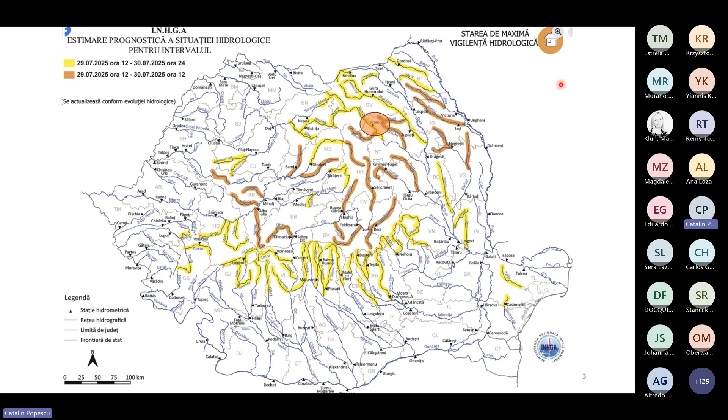So I will begin by telling you where we are actually now and where the flood events happened. They happened in the north of the country, just upstream of one of the oldest and largest reservoirs that we have, situated behind one of the largest dams in Romania, Muntelui. Just at the end of July, there was some commotion about the probabilistics on the maximum hydrological events that would happen, but nothing could have prepared for exactly what happened there.

So this July, we had a very rapid rise in river levels, and the hydrological effects were constant for about 3 days. There were a lot of damages and a lot of human life losses due to the fact that nobody was actually very prepared to intervene.

Some works for the river training had been carried out during the past 20 years, but unfortunately they were carried out for some flows without taking into account the climate changes. The protection works were carried out for a maximal exceedance probability of about 1 in 5.

What happened actually, the precipitations convected. We had, according to locals, because there were no actual weather stations there, more than 200 millimeters per square meter in about 12 hours, whereas in the whole basin there were about 35 to 90 liters per square meter.

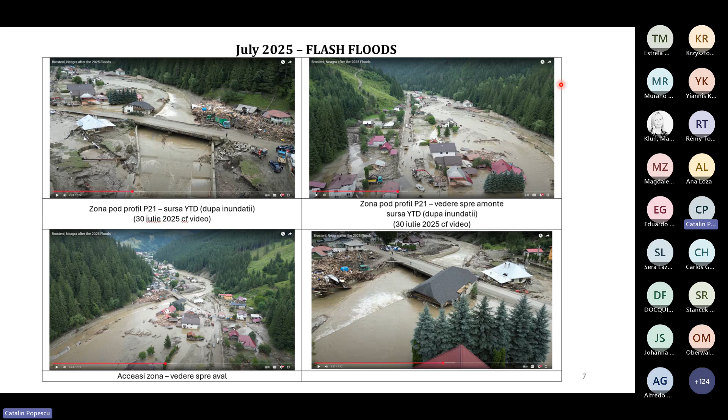As you can see, these are images from the 3 days of the floods, and the flood outcome was more than 100 million euros of damage. Here are the heights of the water level, and a lot of houses were destroyed. With the reconstruction of the peak discharges, we had about 280 cubic meters per second on a tributary, and on the main river about 500 cubic meters per second.

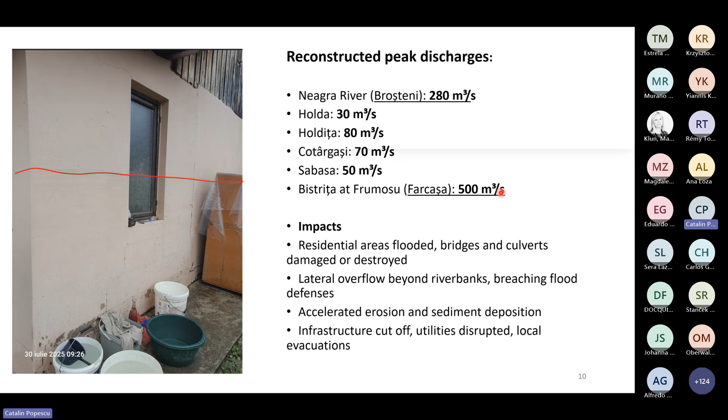This all happens just upstream of the large reservoir. As you can see here, we had 3 gauging stations, all situated upstream of the reservoir. This reservoir has about 1,200 million cubic meters, and on average, we had these hydrographs. So we had a very, very high discharge of about 500 cubic meters just in the back of the reservoir. And the reservoir, due to its large capacity, held up until the end of the flood with no problems.

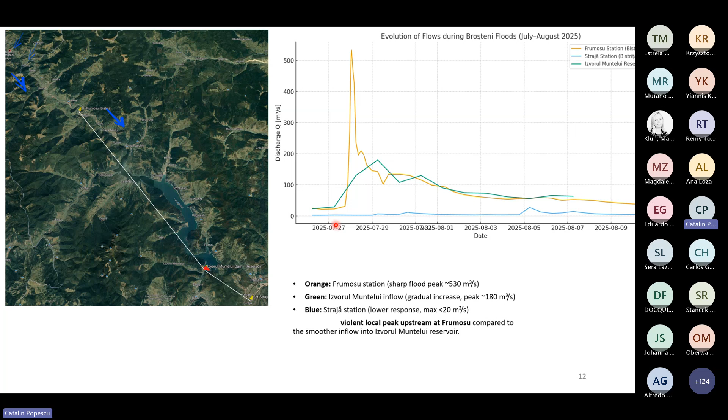Just a few words about the basin. Everything happened just upstream of the reservoir, and then all the basin is regulated by about 11 dams downstream and 1 large dam, 1 regulatory head of cascade. And as you can imagine, nothing happened after the control of the reservoir.

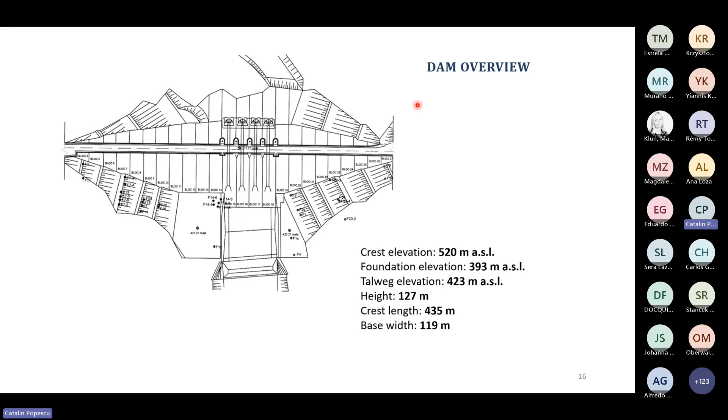The dam itself has almost 75 years of existence. It was built during the 1950s over a period of about 12 years. It's of class 1 importance, category A. It's multi-purpose, with a capacity of 435 gigawatt hours of energy, and it stores about 1.2 billion cubic meters. It's a gravity concrete dam, as was the custom in that period for building dams all over Europe and mostly in Romania.

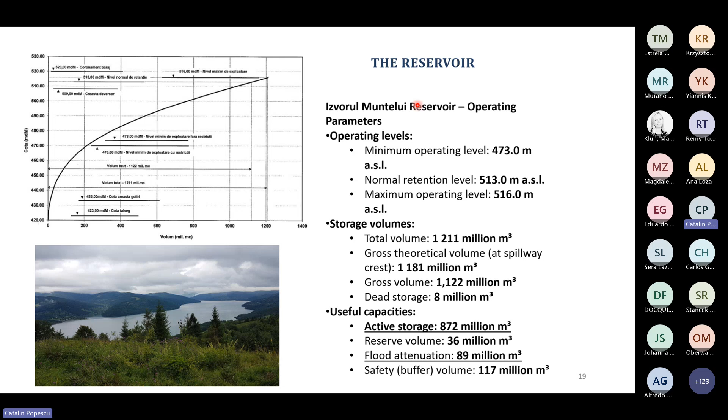It stood the test of time very well, and it has 4 bottom outlets and 4 spillways controlled by gates. There are no problems whatever happens here. The active storage is about 872 million cubic meters, and the reservoir houses just under 100 million cubic meters of flood attenuation. It's built for 0.01 probability of exceedance, which is 2.4 thousand cubic meters per second, with a flood of 493 million cubic meters.

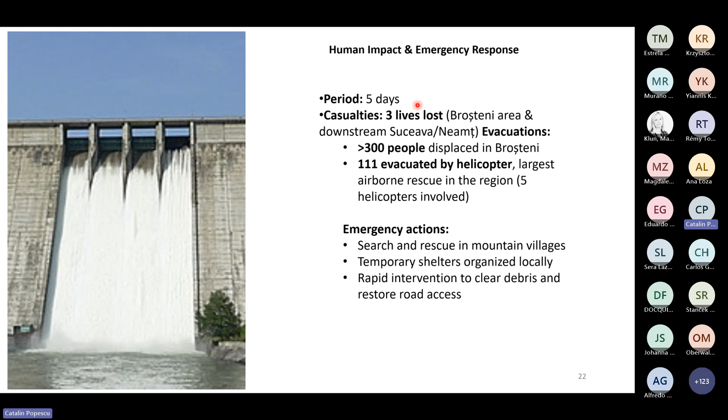The outcome: everything flowed in the back of the reservoir. Everybody had to clean up for about 1.5 months to get rid of the wood debris. And this was the outcome of these 5 days. As casualties, there were at least 3 lives lost, and more than 300 people were displaced. A lot of them were evacuated. More than 200 homes were destroyed, and the material losses came up to about 90 million euros region-wide.

The main hydrological drivers were the convective rain, and the reconstructed peaks yielded up to 500 cubic meters per second. Before I wrap up, the outcomes of this extreme event could have been avoided just by having one non-permanent reservoir just upstream of the town that was flooded. It would have cost about 12 million euros, with minimal losses. So by a small calculation, about 8 to 9 times investment return on a dam about 35 meters high and about 200 meters in spread.

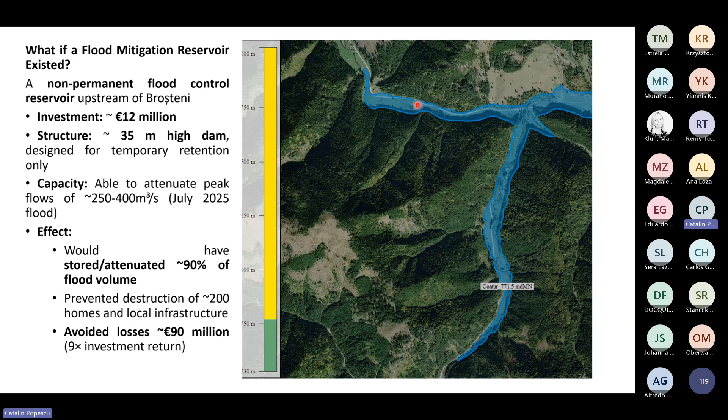And now our final speaker is Rémy Tourment. Remy is a senior researcher at INRAE, a French public applied research institute, specializing in dam and levee safety for over 30 years. He coordinated the International Levee Handbook, leads research and expertise on levees in France, and serves as vice president of the French Committee on Large Dams, as well as chair of EurCOLD's European Working Group and ICOLD Technical Committee on Levees. Rémy Tourment will focus on the role of levees in complementing dams for effective flood protection. Remy, the floor is yours.

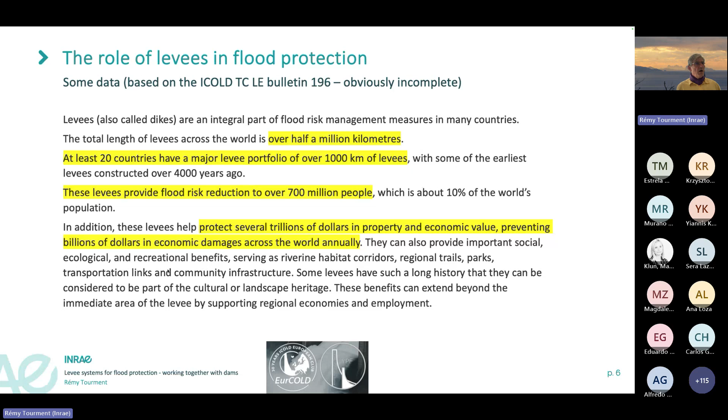They provide flood reduction to over 700 million people and protect several trillions of dollars in property and economic value. And they prevent annually around billions of dollars in economic damages. Levees protect against flooding up to a given water level, but in the case of a breach, the consequence of the flooding can be a lot worse than if the levee did not exist. Breaches can happen sometimes even before the apparent protection level is breached, for instance, if there is internal erosion, which is sometimes frequent.

Levee failures in France. We have a modern history that starts in 1993 and 1994 in the Camargue. We have different flood events that are listed in the slide. I won't read every one, just about the picture, which is the downstream Rhone River again, 10 years after the first ones. And as you can see on the photo, you can see the breach itself and the flooded area, but on the satellite photo, you can see all that was flooded, everything in blue, with red arrows figuring the breaches.

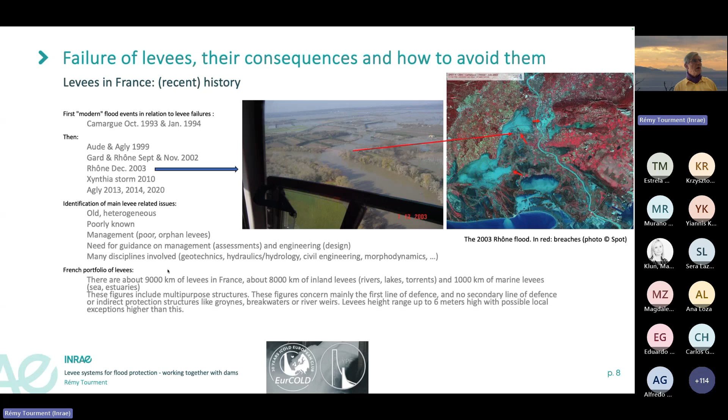To avoid these failures, there is a need for proper long-term management and also for professional engineering, which was not the case when many of the levees were built. So the situation in many countries is the same as was described for France when we started to have the first failures. And also a lesson learned, because we looked also at the past centuries, is that there were levee failures in the past, and levees were repaired, often they were raised. That's not enough, because decades can pass without another major flood event. Levees are forgotten. If they are not managed in the long term, constantly, they will probably also breach during the next event. So the key issue is to have long-term management.

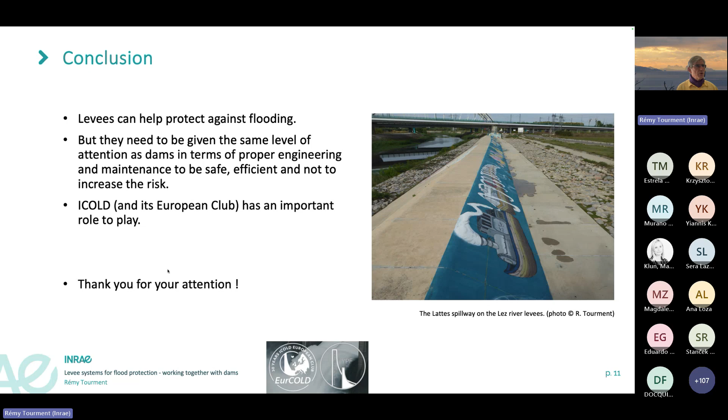As you can see, this is an example of a spillway on the Lez River in the south of France to avoid overtopping and failure of levees on the rest of the system. And you have on the next few slides, that I will not detail, some examples of documents that you can download and read if you want to learn more about levees.